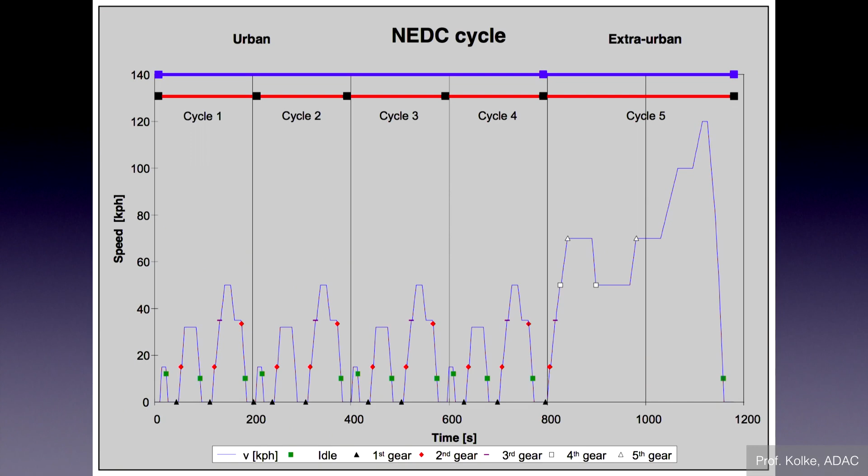And there's a very good report by ICCT, which is Mind the Gap, which is like what you hear in London when you go on the tube. And what they mean is the gap between what gets out when you measure emissions like this and what gets out when you actually drive the car. And that gap is widening year by year, because engineers get better and better at optimizing for this cycle. The cars on the street, they do get better as well, but less, right? That's why the gap widens.

And trickery on those tests is very common. I'm sorry you probably can't read that in the stream, and probably can't read that when you're back down there, but that's an original slide I had to take from Transport and Environment, from that report which I just named. And what it says there is what tricks people are doing to actually drive down the emissions.

For example, they blow up the tires by 3 bars more than you could actually use them on the road. Now when you do, the bottom of the tire looks like this, right? So that means you only have a very, very small portion of the tire that still touches the ground, so your resistance gets reduced. They put diesel into the oil because diesel is lighter than the oil which you're using inside a vehicle, so friction gets reduced.

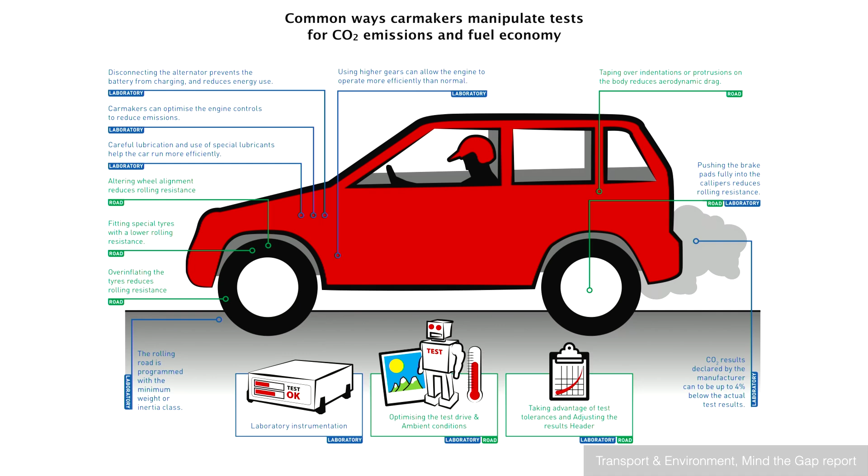They take off the side mirror on the passenger side, because that is not legally required to exist, so it's resistance, so they get away with it. They tape close all of the openings of the vehicle, because obviously when the wind goes over it, it goes much smoother once you have everything taped. And all of these things are either okay or they're a kind of borderline gray area. And they do this. This is how emissions are actually tested.

So this is why an engineer, when he looks at this, says, yeah, it's an optimization problem, right? They want me to get a low number, and I have pretty clever ideas which involve diesel and sticky tape and everything to reduce the number.

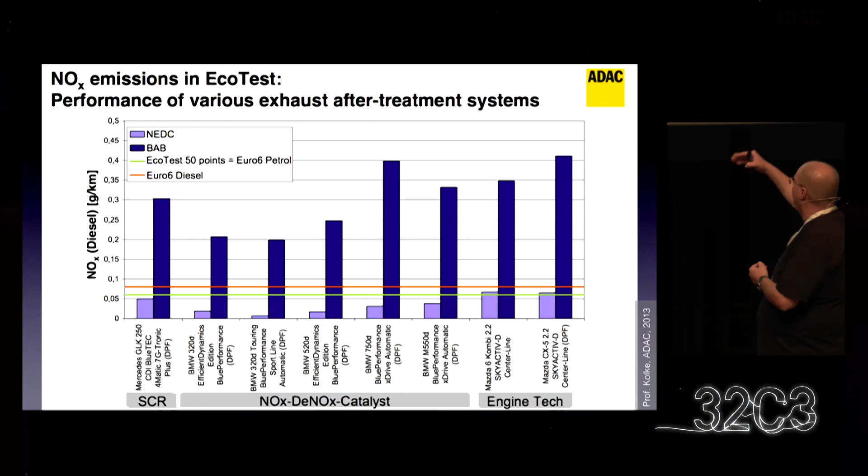The results are this. That's from a 2013 report from ADAC, the German MOT company. And what you see is the lighter blue ones are actually the emissions which the car produces in this cycle. The darker blue ones are the ones which they produce when you just go on the motorway and drive them. And you see that there is a discrepancy which is 10 times, 20 times, 30 times the measured data.

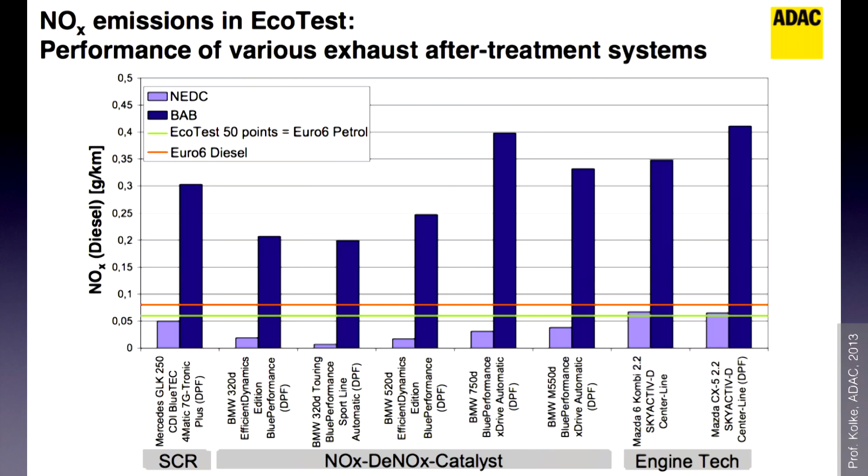So what you need to understand is that even in the past, nobody in the industry ever thought that the data which was measured had any real connection with reality, right? The only connection was you knew that what you're measuring within the duty cycle NEDC is definitely less than what you would ever see in any real-time use. But that's it. That's no secret, right? It's something that has been out there for years.

Now, the folks at Deutsche Umwelthilfe, which are actually people that helped find out what Volkswagen did, they wanted to see, did others do it as well? And because I wanted to give you as much information as possible, we're going to look at this product here now, which is not a Volkswagen, as you may see.

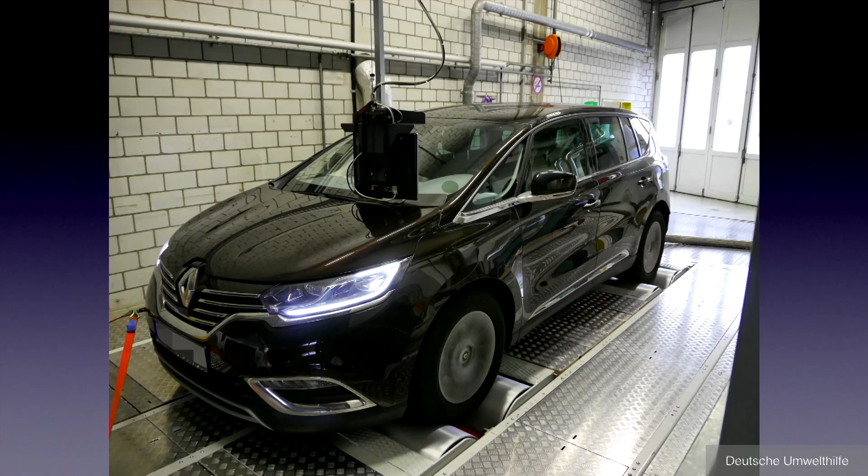Now, why is all of this now a problem? This is now a problem because of the American legal system. The American legal system is very, very different from what people in the European Union are used to. In America, there are two things which are a bit strange, perhaps, to somebody who's accustomed with, say, a German legal system. The first thing is there's juries. So there's common people that actually decide about what's right or what's wrong.

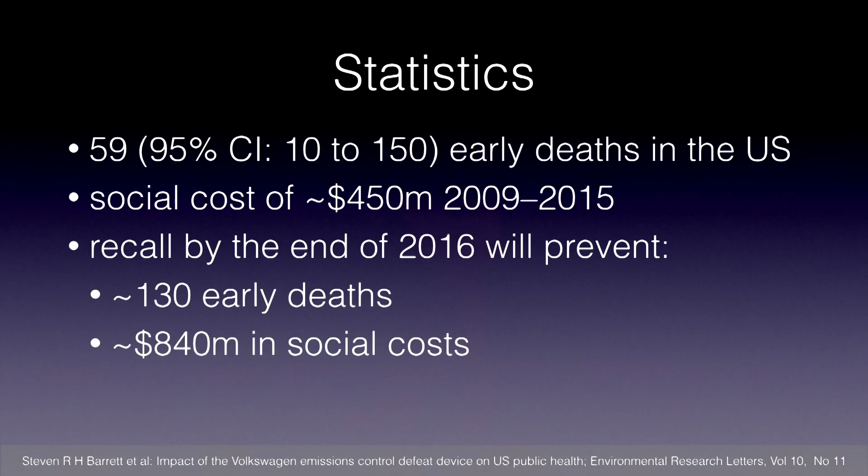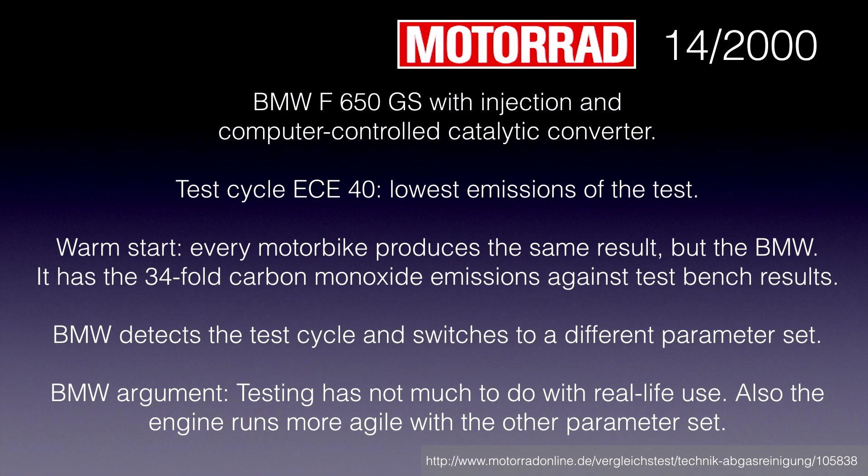The only problem is that even in 2000, BMW was caught cheating by the Motorrad. So this is 15 years ago. 15 years ago, BMW actually put the same code, which we are now seeing in Volkswagen, into their ECUs for the F650 motorcycle. Right? And we were seeing again here the same 34, in this case, fold increase in between real use and test bench use.

Now, honestly, they've been caught early, and they fixed it. So in 2001, they actually brought a new version, and apparently that didn't have this cheat code anymore. But here we see a pattern again. Too little time for development, too little money willing to be spent on this. So engineers try to trick. When you get caught, and you get caught early, probably none of you remembered this here. It's fine, it kind of fades away into history. If you're Volkswagen, you have 11 million cars out there, you have a big problem.

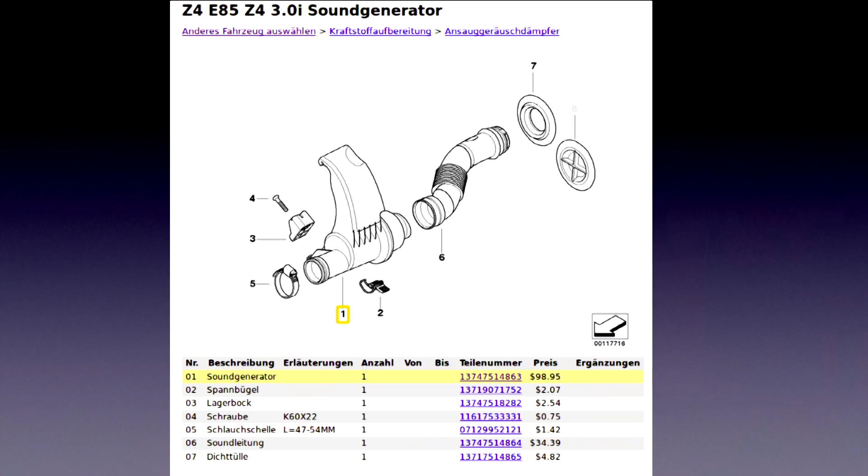Okay, I'll skip this one. It's really nice. You'll see it in the slides, but I have to go to this here to give Felix enough time. So how does component development work?

There's a huge set of legal frameworks. It's a very structured top-down process. You get requirements from the people that represent the market in the company. You get requirements from the CFO, from the finance director. And these are broken down into documents which are more than 1,000 pages long. And there's every single detail that could exist in this ECU written out. There's a piece of paper for everything it does. Everything. There's not a bit in this thing which is not pushed down into a very hard set of requirements.

This is then put into a tool, often Rational DOORS by IBM or something like this. And then every time something changes, this is documented. There's a complete paper trail, right? So that means unless there will be a cover-up, unless we're not given all the information as a public, there's no way Volkswagen cannot find out who did exactly what at what point in time and which level of management was involved. Because every step of the development goes through a Q gate, a quality gate.

There's managers sitting there, and they're approving everything it does, every progress that has been made, and they're getting reports at least bi-weekly on the progress. And these reports go up the ladder, right? They are copied to the next levels of management. So this is a fully transparent process, and this is a fully top-down driven process.

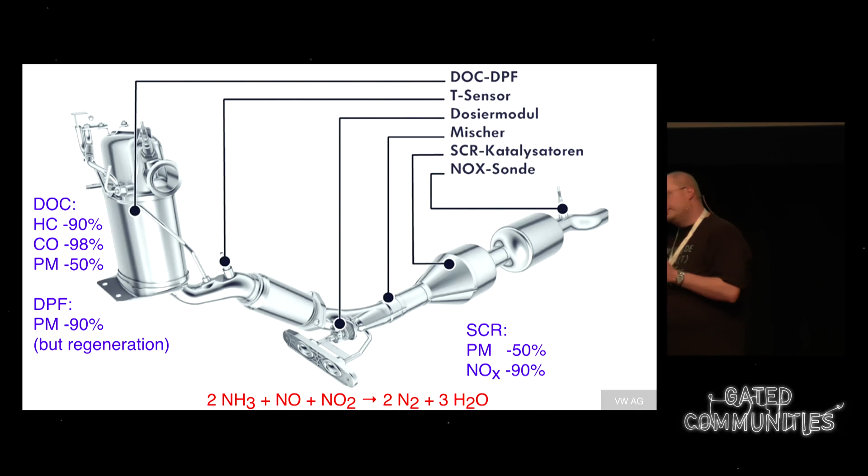Then you have a filter that basically traps all of the diesel particles, the stuff that causes cancer in your lungs, but you have to burn them out at some point in time, about every 700 kilometers, when there have been enough collected. So it's a bit of a trick, right? The trick is you collect them so they don't exit the exhaust, but at some point in time you have to burn them again so they do exit the exhaust.

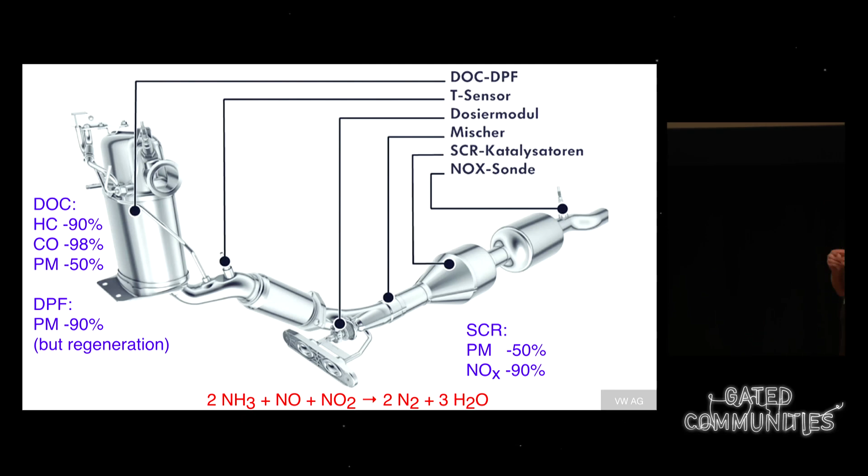Now the positive thing here is they get larger, and the larger they are, the less risk they, at least as much as we know, cause as a health hazard. So this is the DPF here. And then at the end, this is the really interesting thing. This is what most of the scandal now focuses on. There's a selective catalytic reduction.

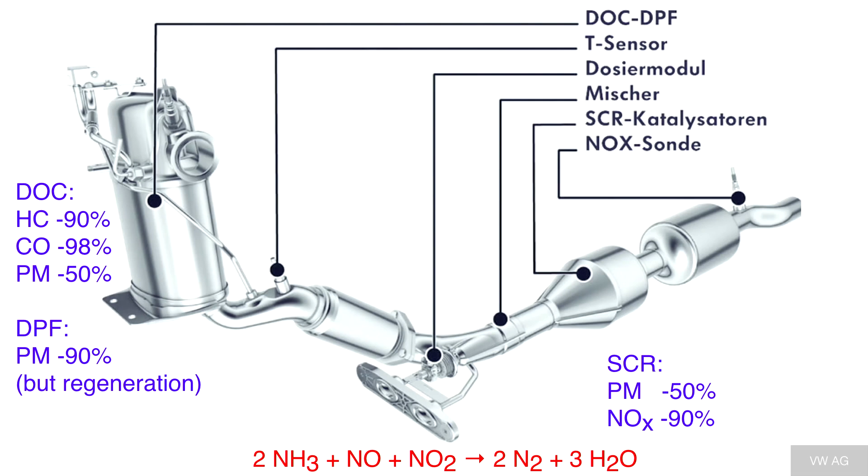And what this thing does is it does reduce the particle mass. It does reduce the particles. That's nice. But the interesting thing is NOx. It goes against this to about 90%, right? So this is what it is made for. It basically injects urea into the airflow and helps to reduce the NOx content by creating byproducts, which are mostly water that comes out of the end of the exhaust.

And this is a very complex technical system that has to be managed, and this is managed by an ECU. The ECU which they selected to do this, and everybody does, is the engine ECU. Because to the left of the diagram before was this big engine, it fell off the diagram, but that's actually the fan blowing into the system. So this is what you want to manage to actually control what happens there.

Now this thing is quite a sophisticated processor. It's about the most complex device outside multimedia and entertainment which you find in the car. And it is a very proprietary thing, because it contains a physical model of engines. So there have been hundreds, if not thousands of engineers sitting there and modeling how an engine works, really physically modeling it.

And the things that an OEM, so an original equipment manufacturer, a car maker, can actually tweak are variables. Right? They can say, okay, my engine has this and this size, my combustion cycle looks like this and that. But the code itself is opaque to the OEM. It is a proprietary product which you can buy from Continental or Bosch or so. And there's about 20,000 variables which you can tune, and this thing is simulated and tested to death, because it is hugely important.

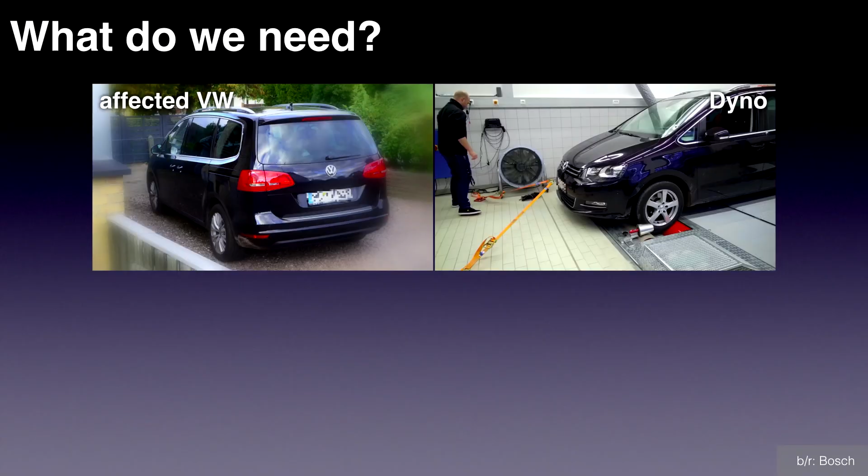So what do we need for this approach? First of all, we need a car that's affected. You need to drive that car somehow, and driving a car on an open road can be dangerous if you have to follow a particular driving cycle. So there's a dyno which you can put the car on, and then you can just drive without the car physically moving. The wheels are moving, but the car isn't. This is what other people have done, and they've taken very interesting measurements. However, we as hackers can go one step further. We can take a look at the ECU itself.

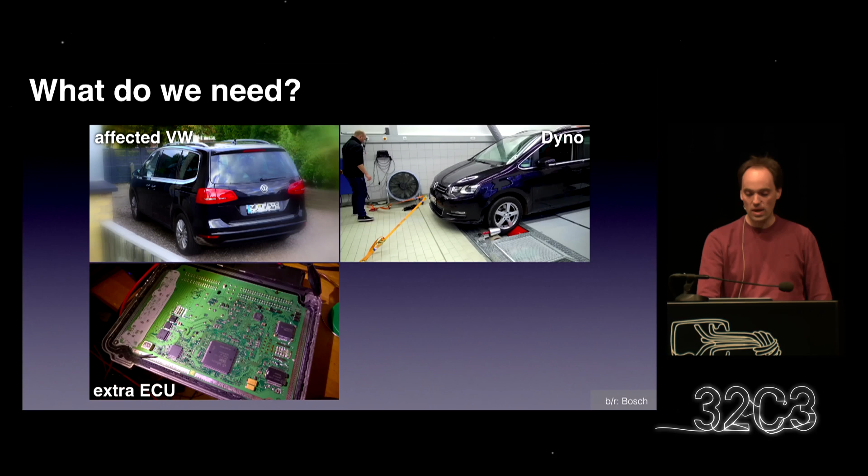And not only that, we can also ask other people who worked with these things and may be able to get more information about them. I will talk about this in a minute.

So first of all, this is my car. Luckily, that car was affected by the recall. So I was very happy when I got the letter telling me I have to go to the shop in January and get a firmware update, because firmware updates are exciting, right? I love updating things, so updating a car seems great. Yeah, it sucked that my car was putting out more emissions than it should have, but otherwise, it gave me the chance to actually look at the car. I mean, I could have rented a car or something, but that makes it much easier.

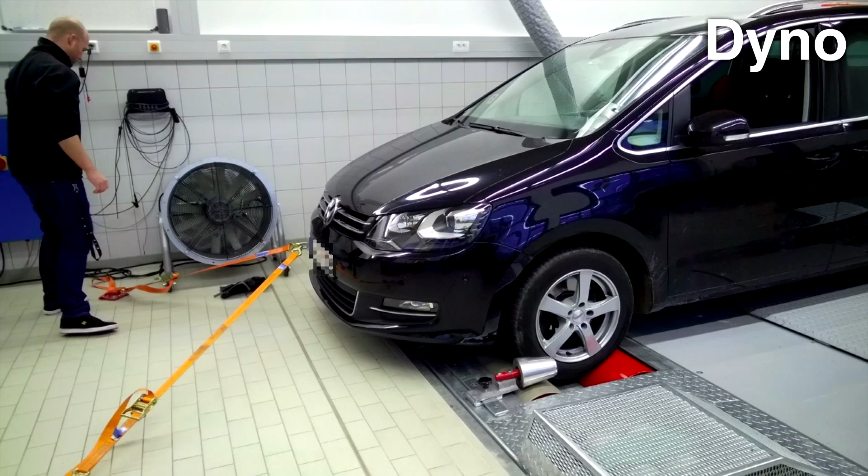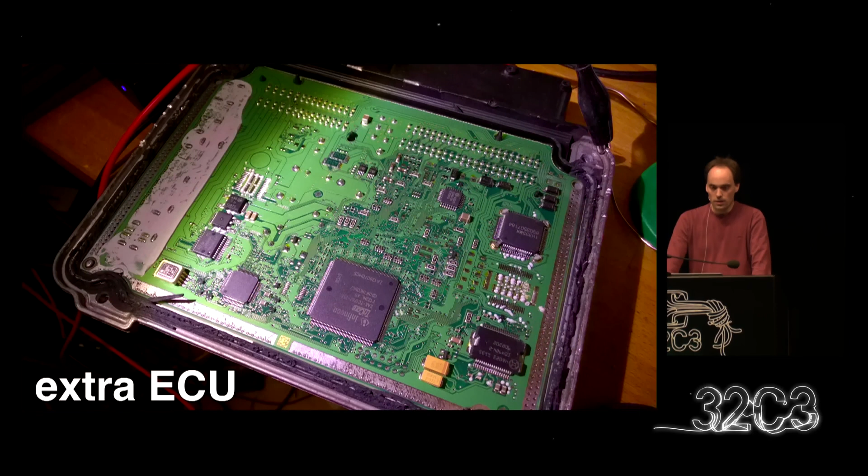I also went on a dyno with my car. On a dyno, there are no speed limits, there are no people to run over when you just have to keep a constant speed or something, so it makes things much easier. And yeah, okay, I talked about ripping apart my car and just assembling it. I didn't really want to do that. So what I did instead was what I always do. I go to eBay, and I bought an extra ECU.

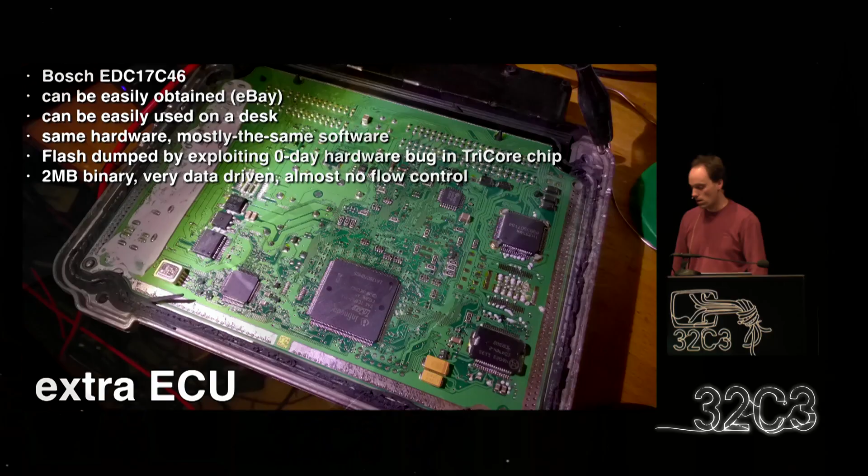Here it is. Maybe we can show it. You can go here after the talk and take a look at it. So this is the ECU. This here is the main CPU that also includes the flash. On the other side, there are the power drivers that drive the actual stuff in the car. And then there's other like watchdog circuits and so on. Okay, thank you.

Okay, yeah. So the ECU was built by Bosch. It's an EDC17C46, that's the name of the hardware. And it can easily be obtained on eBay, and you can put it on your desk, you apply 12 volts to it, and then it boots. It will complain about a lot of sensors being missing and so on, but you can see it executing code. And it doesn't have this very same firmware as my car, but it's very close.

And the flash chip is unfortunately in the same package as the main CPU, which is an Infineon TriCore chip, which is apparently only used in automotive equipment, or at least I'm only aware of it being used there. And I was able to dump the flash by attacking the hardware and exploiting a bug in the hardware that I haven't found documented anywhere, but it was not that complicated. And then I had the firmware dump. I had a 2 megabyte binary, and I threw it in a disassembler.

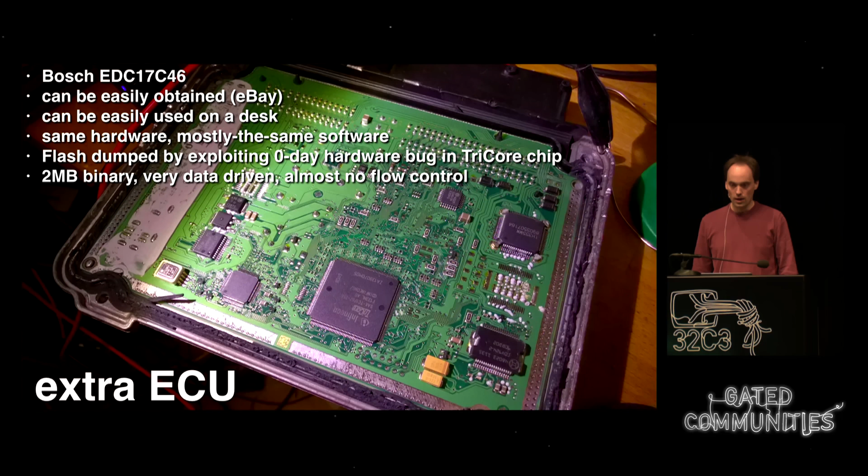And what we see is interesting, because the code is written very differently from other code that we know. So usual code has a lot of flow control and usually more or less resembles spaghetti code. This was the exact opposite. It's more like someone took electrical schematics and put them into code. So there's a set of input signals, there's a set of processing on it, and there's a set of output signals. And that gets updated every 10 milliseconds or once per rotation, depending on the process. So it's a very interesting way of writing software and building this.

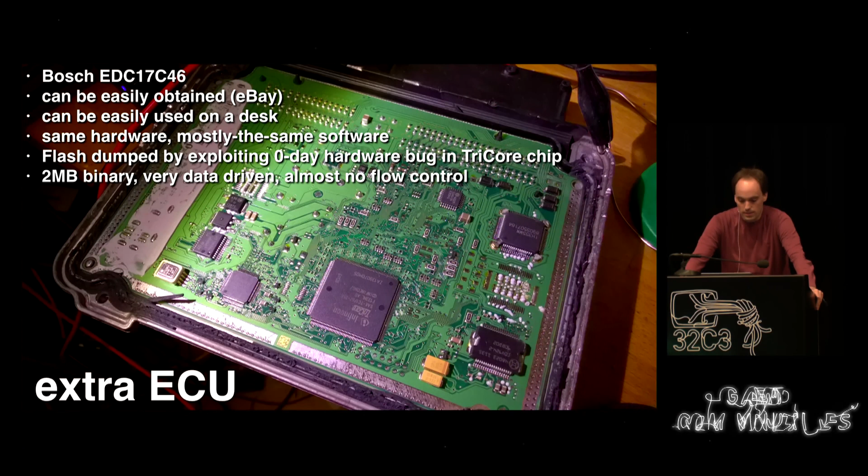And also, it's very data-driven, so a large part of the firmware is not code, but data. And all of the computations don't use constants at all. They always refer to something from the data section. And as Daniel said, Bosch writes this code. The code is not directly visible to Volkswagen, but they have visibility into this data, they know what the data does, and they have tools to change the data. So Volkswagen and other companies can customize this. Really, they cannot just customize it. They can change the whole behavior of this ECU by changing just the data, not the code.

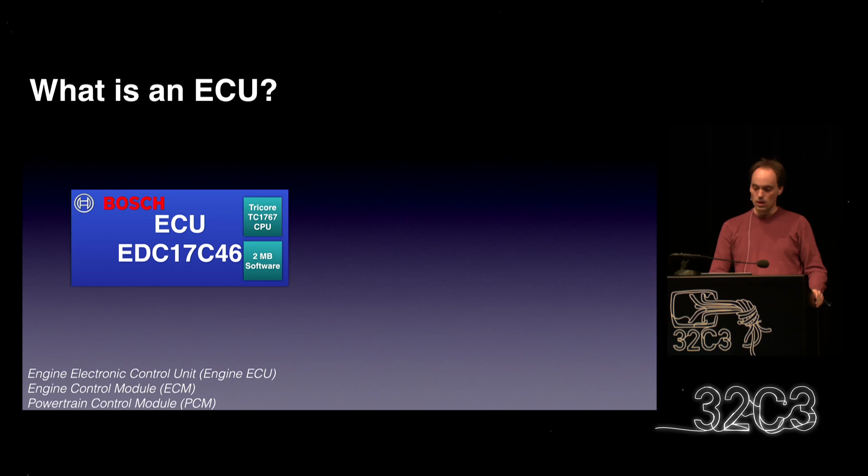The ECU really is a small embedded machine in your car that takes care of the engine. It's an engine electronic control unit, or there are multiple names for it. The most important thing that it does is that it takes sensor input, for example, the throttle, and then it applies control to the system. For example, it calculates the amount of fuel to inject, the amount of air to inject, to make the motor run at the speed you want it to run.

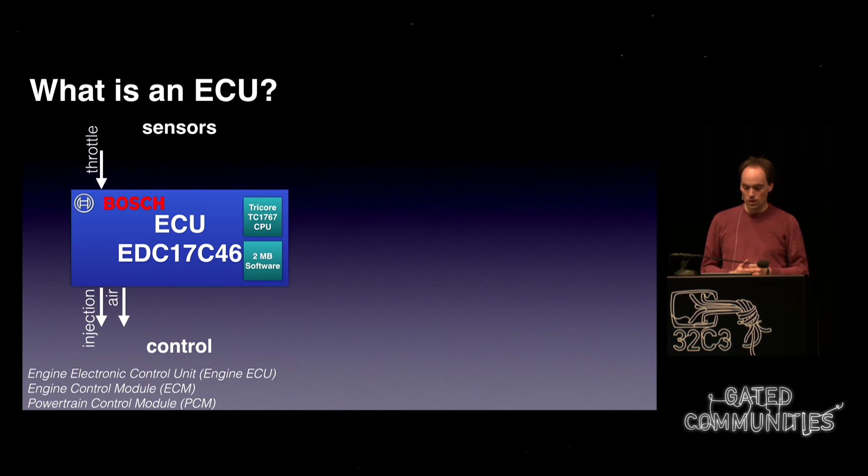These days, it's much more complicated. And one important thing the ECU does these days is emission control. And so this is why we would expect to find the cheat code, the code that Volkswagen used to cheat in the whole thing. We would expect to find it in the ECU.

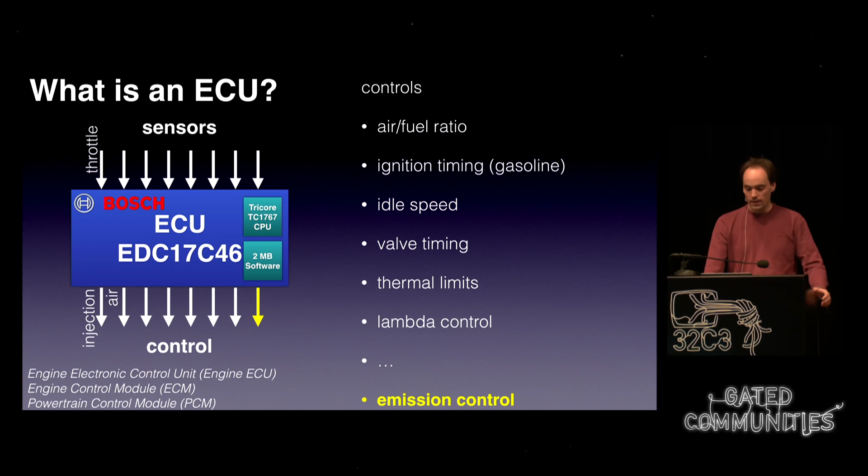Now, taking a look at a 2 megabyte firmware binary that doesn't have any visible strings in it, it's kind of painful if you just do static code analysis. So what I did was to do real-time logging. So you can actually read data from your ECU by plugging into this OBD2 port, which is next to your steering wheel. And while the engine is running, you can read out certain data.

Usually, you can read out boring data like RPM and speed and some things that the vendor wants you to see. But there's also a mode that's a little bit hidden, but you can get pretty easily into it, where you can read by address, where you can just read the whole memory. Well, not everything, some security data is locked out. But the data we are interested in, we can read from that memory.

Now, we still need to understand where the interesting stuff is. So we can disassemble a firmware, and that's all fine. We can also get a little help from something called A2L files. So the chip tuners use them extensively when they change the mappings, so that if they want to optimize an engine for a different goal, for example, for more power instead of long lifetime or something, they change things in the ECU firmware. And they do reverse engineer a lot, but they also got these files, and I'm not sure how they got them, but they are out there, and if you use the right Google terms, you will find them. They are specific to each firmware.

I wasn't able to find one for my actual firmware, but I was able to find one for a firmware that's close to mine. And if you look into this file, what you see is the symbol names. It's basically a fancy map file. You see the symbol names. You see a mostly German description of that symbol, of that signal. You see the real-world unit, and you see the address in memory that we can read at. So with the help of these files, we can read almost any internal state in the ECU. We still have to make sense out of that, but at least we know where the data is and what to look for.

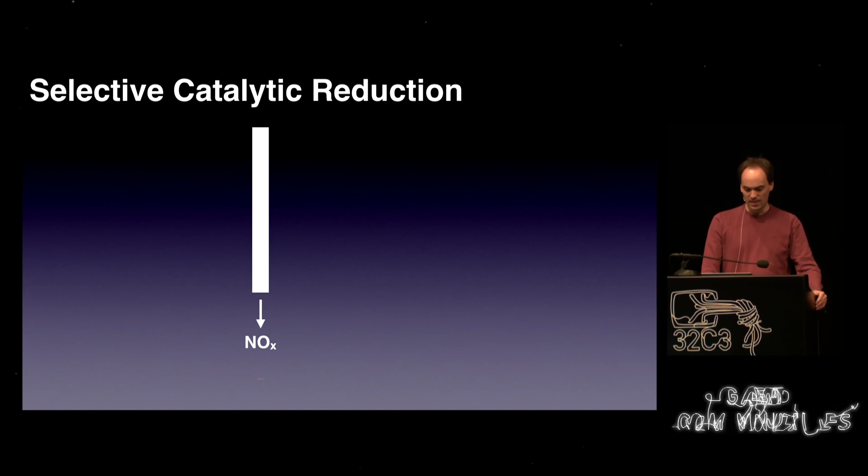But let's get back to topic. So selective catalytic reduction is the process of, well, if you don't have it, you get a lot of NOx, of nitrogen oxides at the end of the exhaust. That's bad. You don't want that. So one way of getting rid of this is to add an SCR catalyst. And the SCR catalyst, I simplified this a lot. You can find a lot more information about this.

SCR is a process that reduces the NOx using something called DEF, or AdBlue is a term for it. It's some fluid that you put in there. It's basically a urea water solution. And the AdBlue, at a high temperature, converts to ammonia, and then it reacts with the NOx to nitrogen and water, which is great because that's not in any way harmful to us.

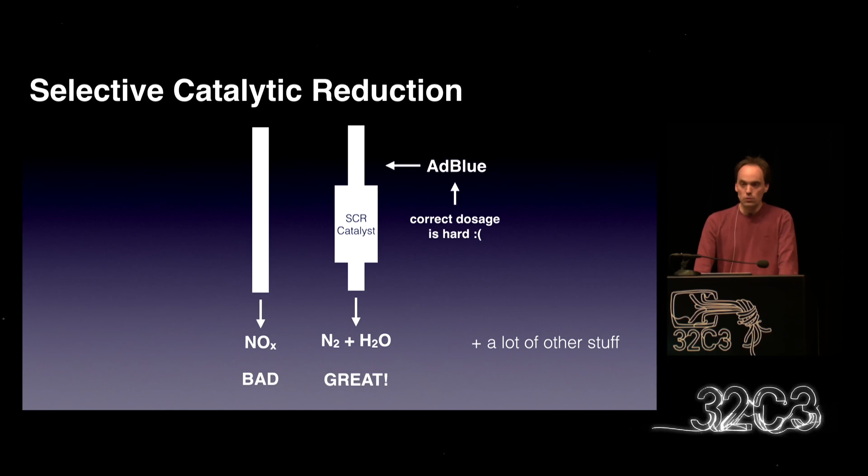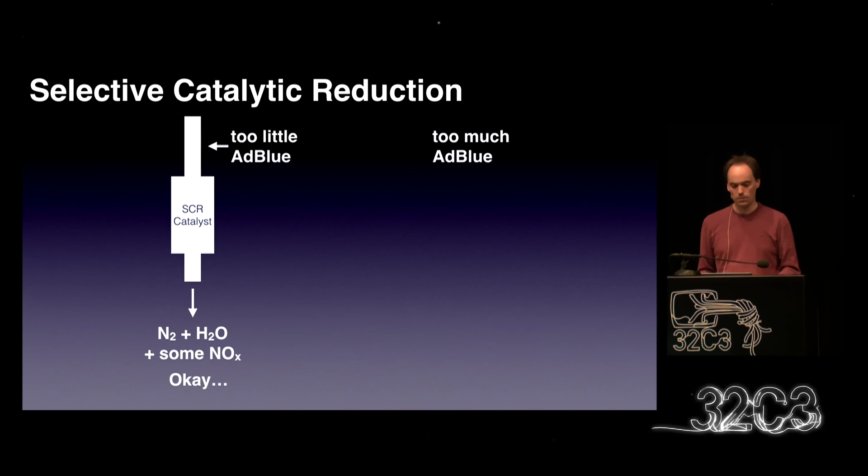However, there's a problem here because the dosage of the AdBlue needs to be correct, and it's very hard to do. If we dose too little of that, well, the conversion is not perfect, and we will still get a lot of NOx at the output, which is, well, better than not doing anything. It's not perfect, but it's not more harmful than before. However, if you put in too much of the AdBlue, what you get at the output is actually ammonia, and you really don't want that.

So the primary goal of emission control, if you have the SCR system, is to eliminate as much as possible of the NOx and minimize the amount of ammonia that still comes out of the exhaust pipe. Ammonia is NH3.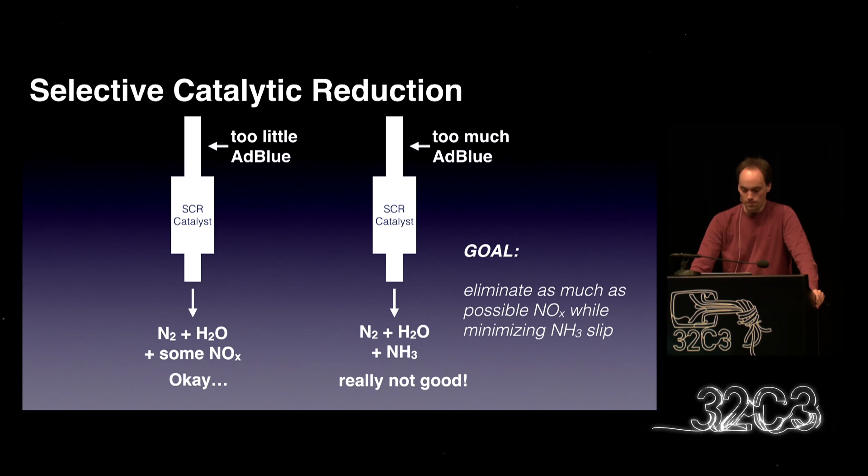Calculating the right dosage works with a model again. So they modeled everything that happens in the exhaust processing. They have a model of the catalyst. They have a model of the internal state. They do have a number of sensors and outputs from the other models that tell them a lot of values, and the model uses this with a lot of internal storage, internal state, and the model then calculates the amount of AdBlue to dose to convert as much NOx as possible without leaking any ammonia.

And the way things usually work on an ECU is that there's one system that controls things, and there's another system that monitors things. And it's independent from the main system, and it tries to be as independent as possible. It's still running on the same hardware, but it's not sharing a lot of code. And there's an efficiency monitoring scheme that if the conversion is not good enough anymore, it will flag this as an OBD2 error, and you will see your check engine light going on, and then you go to the shop, and the shop will diagnose your car and will fix this. For example, if your catalyst is broken.

And based on the test results, we would have expected this efficiency monitoring to actually flag the inefficiencies, but it didn't. So it turns out the main model doesn't always work. There are some operating conditions where the main model is not sufficient. It has certain bounds where it works, and outside of these conditions, for example, if the engine is too hot, or if the exhaust mass flow is too large, the model doesn't produce meaningful results, and it may overdose the AdBlue, and we don't want that.

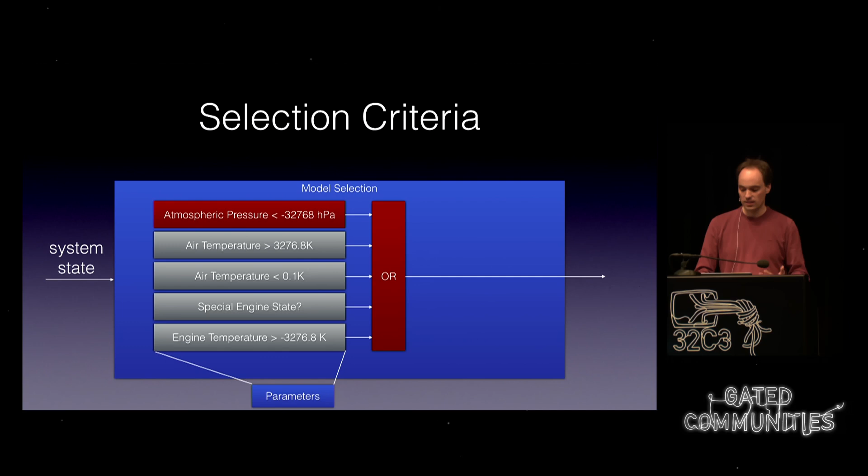And there's code that controls which of the models to use. And there's also a statistics module that counts how often each model is selected. And again, all of this model selection depends on the data. It's code that does the selection, but it depends on a lot of data that are parameters to all of this. So let's take a look at the selection criteria for this alternative model. And we see that a lot of these parameters are dummy variables, right? Things that can never happen. For example, the atmospheric pressure can't be negative. Or the air temperature, I hope it's never larger than that. Or smaller than 0.1 Kelvin, right?

However, one thing stuck out, and that was a check if the engine temperature is larger than a negative temperature, which does not exist. I mean, the temperature is always positive. So the last one is always true. So the model that would be selected would always be the alternative model. And that sounded weird, and maybe I understood it incorrectly, or maybe I looked at the wrong place when looking at these parameters. But if we look at the intermediate results, there's a bit at a certain location that tells us which model was selected, and that bit is indeed always set. So that is weird. It sounds fishy.

So let's take a look at the statistics. The car counts whenever what model you're in. So 20% of the time, my car does not do dosing at all. So I drove some time and then looked at the values. And the 20% where it doesn't do anything is mostly the warm-up cycle. But every time it does something, it's actually in the alternative model, which we know does underdose NH3 because it doesn't want to leak ammonia. And yeah, that makes sense because my car uses much less AdBlue than expected.

So the expected value is roughly 2.5 liters or something per 1,000 kilometers of AdBlue. In my case, it only used 0.6 liters per 1,000 kilometers, which is great for me because I don't have to refill this tank very often. In fact, I never had to do it. The shop always does it when I'm there. But this is fishy, and let's take a look at this.

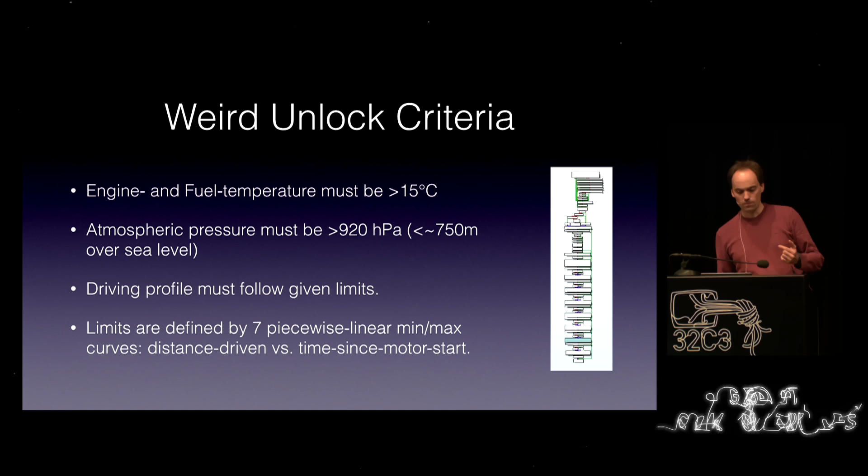But one of the criteria was really weird, because it looks if the engine and fuel temperature is larger than 15 degrees Celsius. It looks at the atmospheric pressure, and if it's lower than 750 meter, that must be satisfied. And if all of these conditions are satisfied, it will move back to the main model that does the proper exhaust processing. And one thing was really weird. There were 7 curves, not all of them used, that define an upper and a lower bound on the distance driven after a certain amount of time.

So this is how it looks in the disassembly. Not sure if you can read this, but the comments are from this A2L file, and they call it acoustic function. I'm not sure if this has anything to do with acoustics. I tried to find all the usages, and there was nothing related to sound or anything. I think it's just a name for it. And now if we go and take a look at these upper and lower bounds, we see this.

So these are 3 curves that are defined. Each of them has an upper and a lower bound. And it's basically the distance that you need to have driven after a certain amount of time. And if you ever fall out of one of these curves, we're switching back to the alternative model that underdoses NH3 and causes the inefficiencies. So this is weird, and I didn't really know what this is.

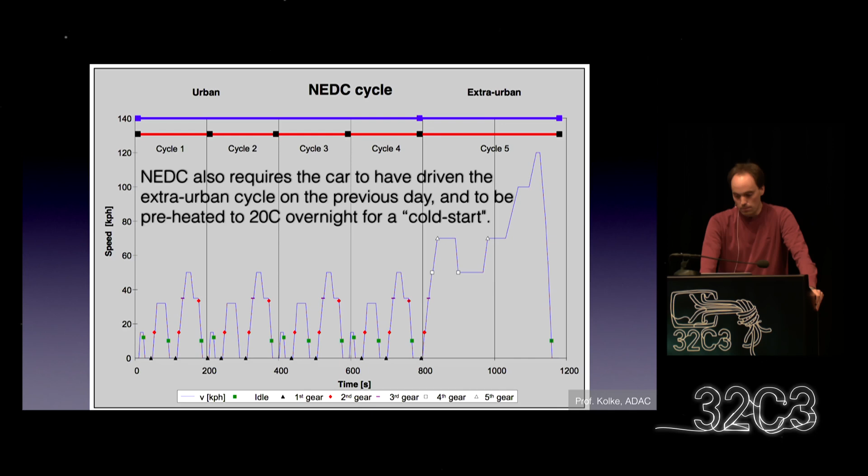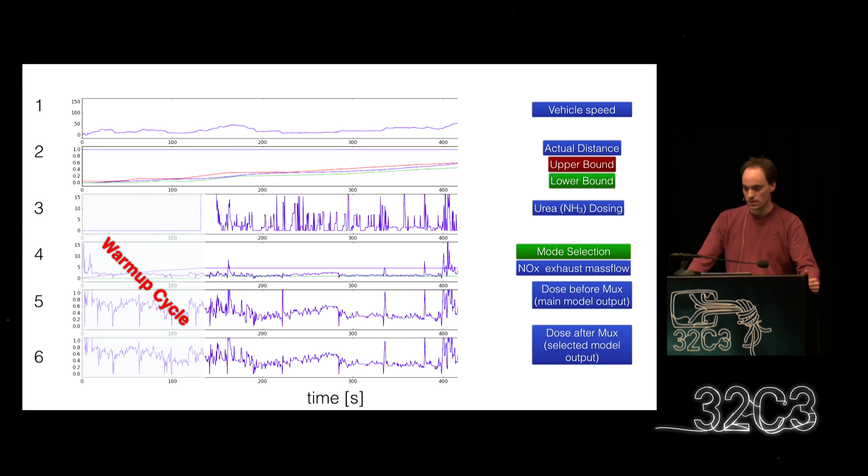And by the way, graph 4 is the actual NOx emitted by the engine based on their model. So the SCR model, the emission model, then calculates the amount of dosing to happen. And as we see, as long as we stay within the limits enforced that match the NEDC, everything is good and a lot of AdBlue is dosed.

And then at the end, I drove too fast. And you can see in the second graph that I crossed the upper bar. The blue line goes over the red line, right? And you can see that the car immediately detects this, that I'm no longer in the driving cycle. And the interesting part to see here is the effect on the AdBlue dosing, which is here. It immediately stops doing the dosing.

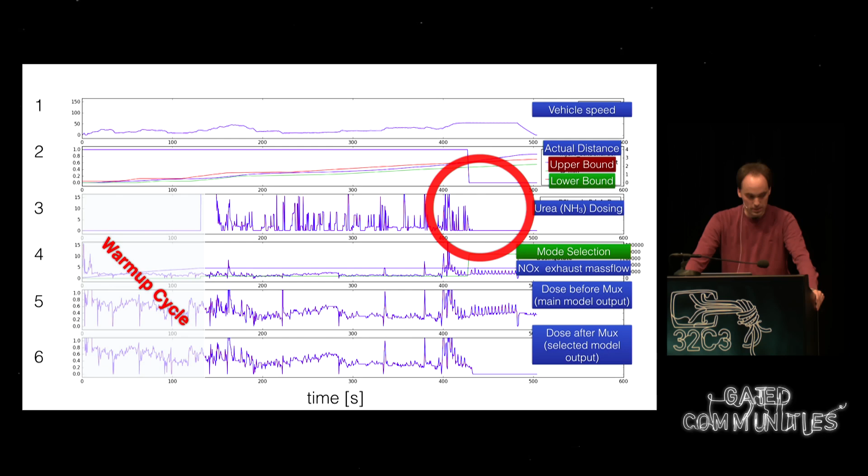And you can see in the model below, the model still calculates that AdBlue should be dosed, but after they switch the model to the alternative model, it just outputs zeros. It doesn't dose anything. So this shows that when we're following the cycle, everything is fine, enough urea is dosed, and then once we leave the cycle, there's a severe reduction in the dosing. And it's all based on detecting these driving cycles.

Two more slides. Two more slides, here we go.

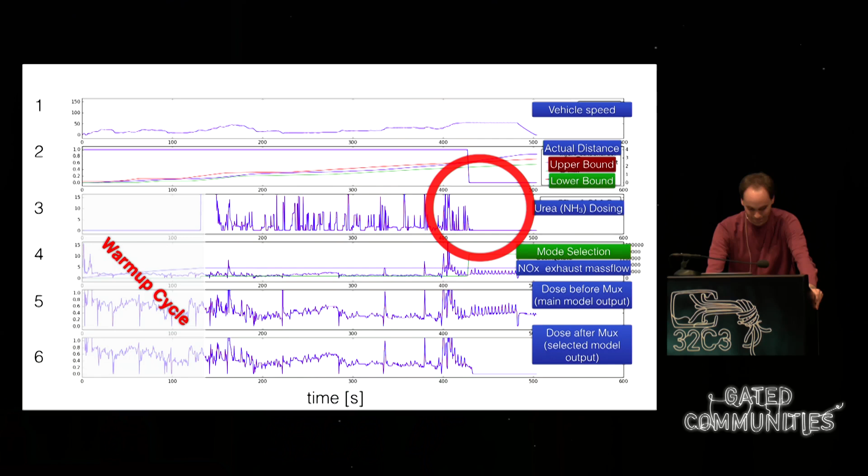So I have to be clear on the limitations here. All of this was looking at disassembled code and so on, so I could have done something wrong here. So take this with a grain of salt. We couldn't do NOx measurements on the dyno, unfortunately.

And I have to stress, we looked at one particular car that uses SCR processing. Not all of the affected cars are doing that, so there are some other mechanisms in the other cars. And I looked at a car for the German market, so at least the curves have to be different for the other markets. But let's re-enumerate the results, and this is my last slide.

Most of the time, on a regular car, a non-standard treatment mode is active that is not as efficient as the real mode that is implemented. We can show the code that is responsible for this. This is this negative temperature limit that they look at, which doesn't make any sense and always selects the alternative mode. And we can see in the logs the state selection bit.

We can see the counters that count that the alternative model is active. We can see that there's an AdBlue underdosing in this state, which causes the inefficient NOx conversions. That's what we've seen before when people put the car in the dyno. We know that the efficiency checks are only enabled in the main mode, and the car does exceed the limits. So this shows how the alternate model is selected that doses too little AdBlue and causes the inefficient conversion.